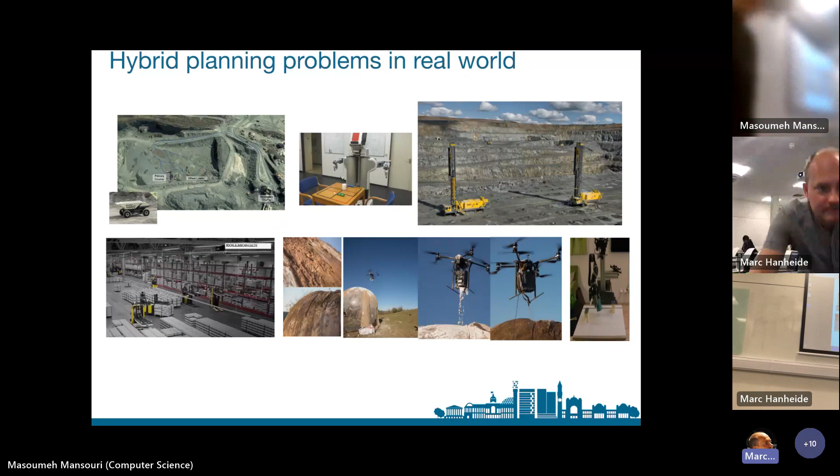So that's the paper we wrote in 2021, Combined Task and Motion Planning: Challenges and Guidelines. If you are doing this type of research, I do encourage you to read the paper because I wrote the guidelines there. I'm going to talk slightly about this paper today, not in depth.

So the challenges, which Marc doesn't like to hear, but I'm going to tell anyway. Most people, when thinking about solving the task and motion planning problem, look at the application, but they have to think about certain specific parts of the application. And what are those specific aspects? We wrote it as five questions.

And I'm really happy whenever I nowadays give a talk about a particular application, people ask me, oh, of the questions you define in this paper, which ones do you consider? So it's a real pleasure to see that the paper, the questions we put out there, have some impact in the community.

Anyway, obviously you have to think about different levels of abstraction. Is this a problem only solved within the task planning domain? For example, if you're doing a game, probably you don't need to do motion planning. What level of abstraction do we have?

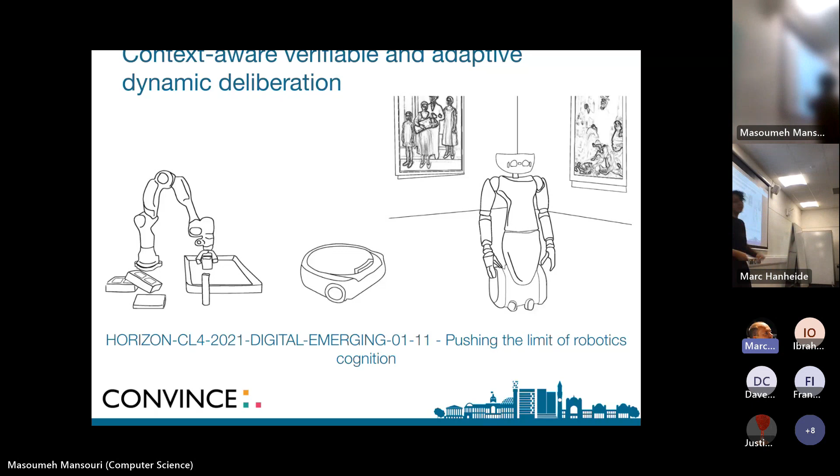So in the manipulation robot, in the assembly task, the task and motion planning really should be done at the same time, because the order in which you do assembly depends on the kinematic constraints your arm has. You cannot just come up with a sequence and then say, okay, now do your assembly, because probably the task you specify for the arm is actually not doable for that specific arm. So that's a good example of task and motion planning.

And this is the part I'm leading on the project, task and motion planning in dynamic environments. And dynamic means everything: it could be humans, it could be the socks on the floor, which could be moved, and reasoning about all of those at the same time.

Yeah. So, just a couple more. I'll talk about this and then I'll move on, because this is an ongoing project. I don't have any results, so I can't show you cool videos and say look how amazing the things I've done are. But I already have to ask a lot of questions, all those questions that I put up there.

So the representation of uncertainty in all these applications is different. We have a human there. This uncertainty could actually result from partial observability, because one brick blocks the view of another, and also the human moving around here. So there's uncertainty over the collaboration and intention of the human. Here the uncertainty would be the amount of socks or wires and the changes and all the furniture. So the representation for the uncertainty is different.

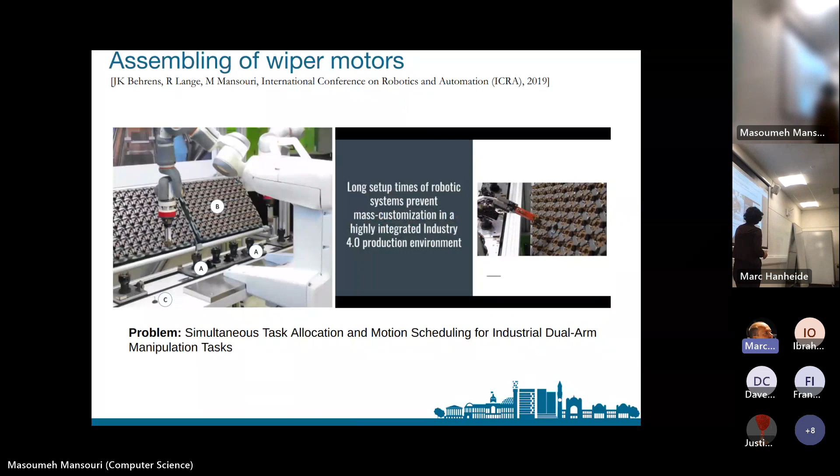of course, if you have a dual arm robot, the task is to allocate which arm does what. And you cannot just allocate randomly or use a task allocation method from AI, because again, we have the constraints of the arm. So not just any off-the-shelf AI algorithm for task allocation would work. Also, there is a motion scheduling part here.

Because we have a dual arm, we want to avoid arm collision. And we have so many items, so we want to solve it in an optimal fashion. We don't want our one arm to really move a lot for another arm. So we want to do everything in an optimized way, as I said.

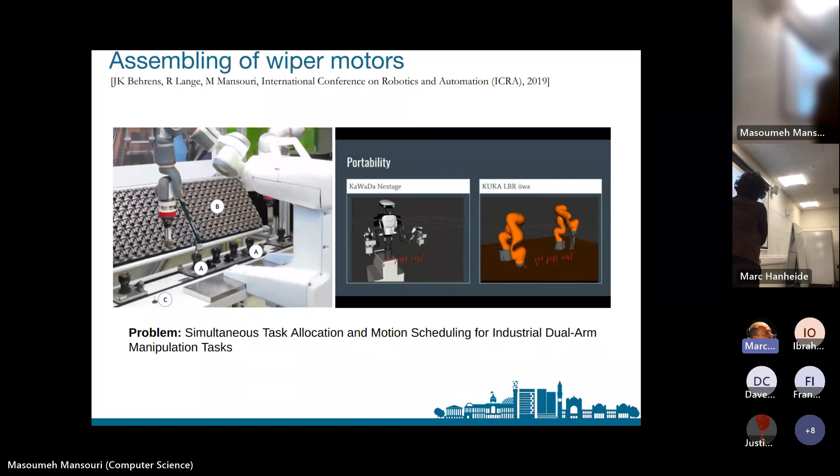We want to optimize the makespan, the time to completion. I don't intend to explain the details of any of the work I present today, but we have to answer some of the questions I put out there. Here, for the discretization and the symbolic part, my student Jan, one of the former PhD students, created a PRM for discretizing the environment, basically that symbolic approach.

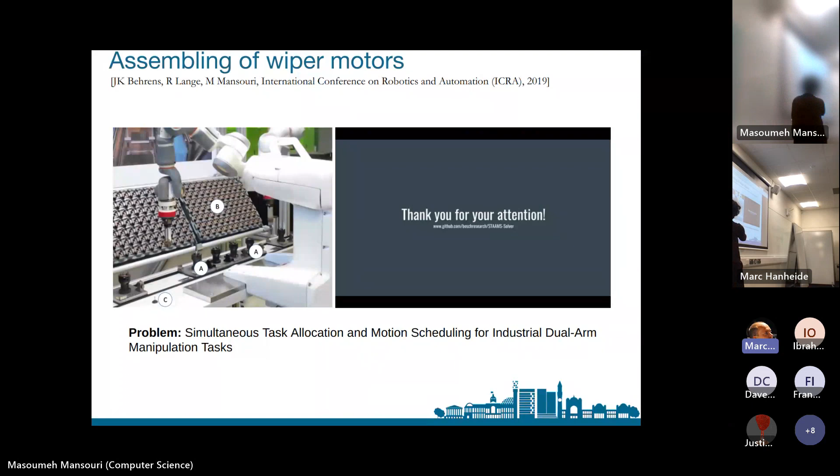And then they use constraint-based reasoning for the combination of task allocation and motion scheduling, where he represents time and the task constraints there. Yeah. So, this is enough.

Again, here, as you probably noticed, there is no uncertainty handling. So we assume that we have knowledge of everything, and this is a structured environment, which is not necessarily the case in all assembly tasks. And even then the problem is still difficult for the reason I just said.

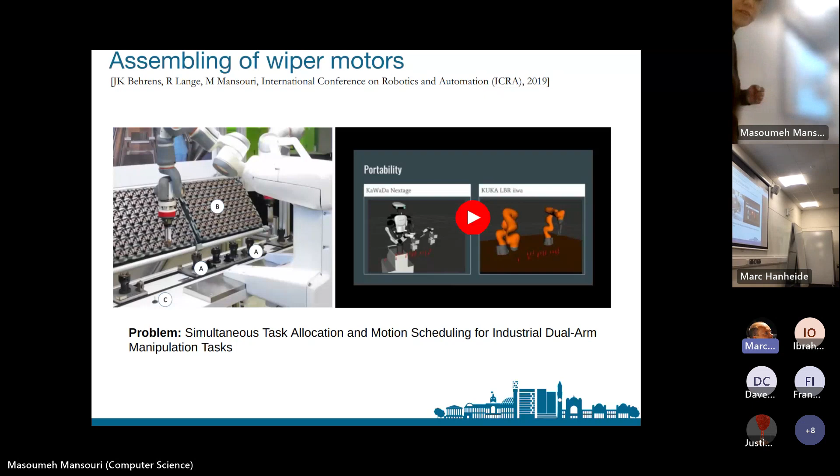My favorite problem of all. I think you know this problem, and for the last 5 years I haven't given any keynote talk where I haven't talked about this problem. It's just amazing, and I'm going to explain why. I have 2 active PhD students working on this project. It's a mining application, but it gets more interesting.

So these are the mining robots. They're huge mining robots, really huge. I've been in the north of Sweden, and their wheels are as tall as me. Their job is going through these drill targets, all those dots over there, and drilling them. And when you drill, it creates a hole and also a pile. When you drill, usually piles scatter around the hole, right?

And interestingly, the task is basically the optimized way, the quickest way, for these robots to drill all the drill targets. What kind of traditional computer science problem can you think of now? The task is to go to every node, basically. TSP, the traveling salesman problem.

So when you drill a hole, it creates a pile, and that pile becomes an obstacle for the robot itself and the other robot, because if you move over the pile, it defeats the whole purpose of the drilling, right? It puts it all back inside the hole. Why would you drill? Again, the perfect example. So you have to navigate this environment while you have to visit every node once.

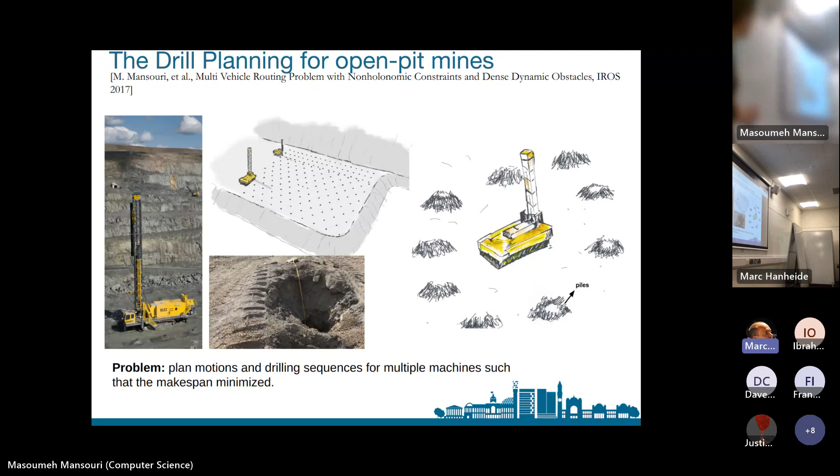And because you cannot just not think about your motion constraints while planning, you cannot get the best TSP solver and then call a motion planner to complete that. That simply doesn't work. And I spent quite a lot of time solving this problem practically, and in a theoretical way.

So let's look at one of the practical videos. This is my first result. As you see, it goes back. It actually goes back to 2017. The timing is wrong, but anyway.

So what you see, I'm just stopping. The behavior you see is the result of meta-constraint reasoning. The overall problem is divided into several sub-problems. Sequencing, and you see the result of this sequencing as this white arrow. Approach angle decision: at which approach angle I approach the drill target.

And that matters because these robots are non-holonomic, so when they maneuver they will actually take a lot of space, and that approach angle affects all the maneuvering. Also motion planning, which is shown by all these white polygons. Coordination, by which I mean robot-robot collision avoidance. Task allocation, which robot does which hole, and sequencing within each robot. All of these decisions have to combine so that this kind of behavior is produced.

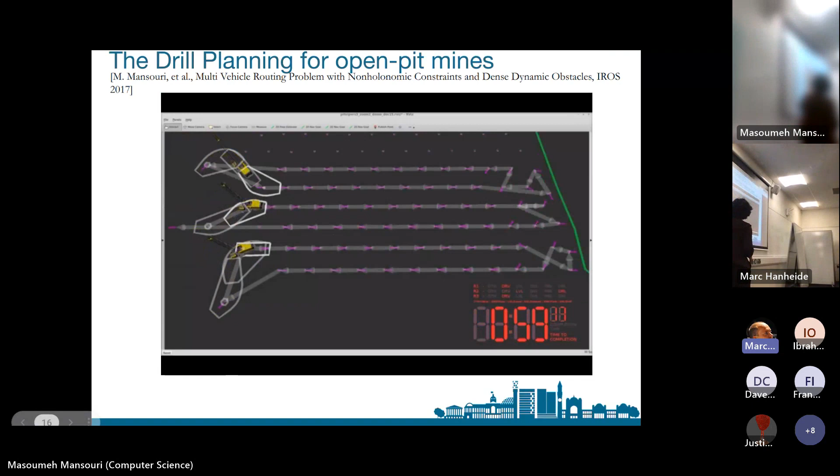So I explained. But this is also a showcase: you will see this robot in the middle of this region got broken and it has to be taken away from the field. I want to explain what's happening. Let's get into the interesting part. By the way, these robots are moving backward while drilling. This is not that exciting information, but it's going to get interesting.

So the robot in the middle got broken, removed from the field, and the robot on the top basically takes the mission that was supposed to be the robot in the middle's. And something interesting happened now. You will see this robot doesn't move, and I will tell you why. First of all, this green line is a virtual perimeter, which is there, for example, because there's a cliff, so the robot should not go beyond that.

So the space this robot has to move in is very tight. This robot is waiting because it's supposed to drill all these drill targets. But if it didn't wait and continued, all the piles drilled by this machine would be destroyed by this machine, because it needs all of that area to maneuver. And you will see that while this crazy maneuvering is done, the machine on the bottom starts moving.

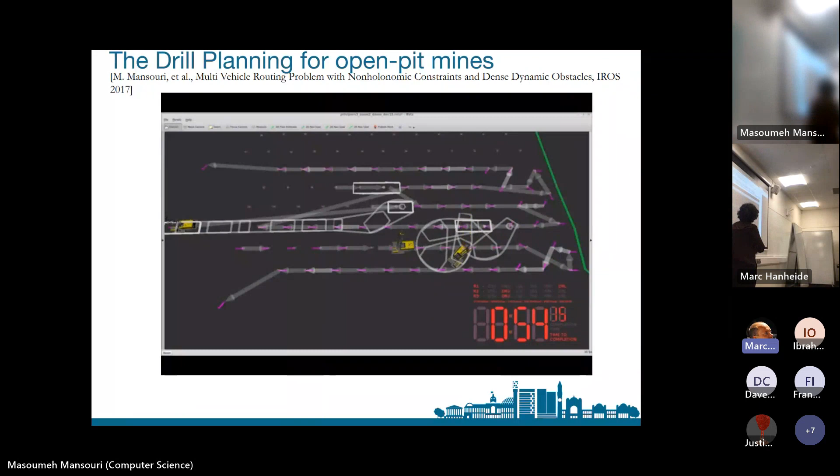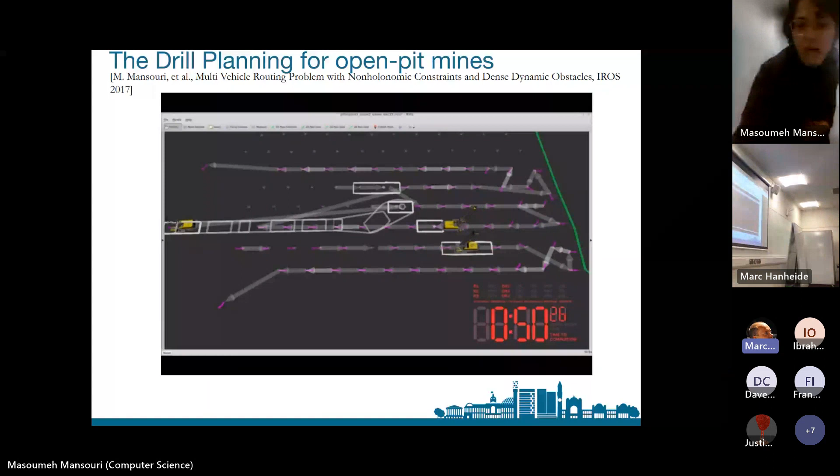Of course, this is not the most optimal solution. You would think that if this robot used that area for maneuvering, the time would be more minimized, and I did use this kind of reasoning in my second paper, in 2017 IROS, which is a kind of hierarchical optimization problem. I'm not going to show you the second video. If you're interested, you can look at the slides.

But here we thought, if this is not a TSP, what is it then? So Sarah, a brilliant PhD student, started working on understanding the theoretical underpinning behind this problem. She formulated it, devised a general algorithm, and defined the self-deleting graph. The same problem appears in painting: you don't want to go over the same place again. In agriculture, you don't want to go to a place you already harvested because of soil compaction.

You would think this problem is different, but essentially it's a dynamic coverage problem where the source of dynamicity is the robot itself. The robot moves and changes the environment. The difference is the discretization. Here the discretization was given by the drill targets. In painting and harvesting you have to discretize the environment in one way or another. But the theoretical understanding of this variation of TSP would help us.

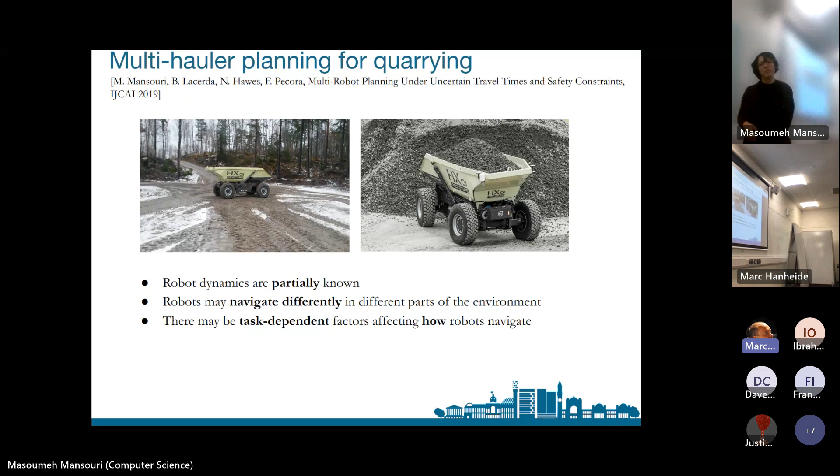Again, why am I doing this? Because the time is very uncertain. Because this robot moving in this environment, the robot dynamics are partially unknown. There could be a sandy patch, a robot may skid over. When robots are heavier, they go slower than when they're not. So we can't actually have a perfect time prediction. Hence, everything is much more difficult. How we solve this, I'm not going through the details. It's very, very high level.

We look at the stochastic Petri net. We model the task allocation as a stochastic Petri net. A stochastic Petri net has different kinds of transitions. One is decision making, for example, which station we want to go to, and there is a transition for capturing that stochasticity, which comes from uncertain time modeling, and we receive that uncertain time modeling from a realistic simulation. We run a simulation and we learn basically that transition, and theoretically this can be translated to Markov automata. This can be related to MDP. Well, everyone knows MDP, and then we have a team policy. Voila. I like this problem because you can actually theoretically guarantee the specification you have.

You could have learned this from data, but Volvo didn't have that data. You guys, because you have a lot of collaboration with industry, have loads of data. You can think of a similar application with similar constraints. You could have put in your learned distribution. The video is not that interesting, because it's in simulation, and this work is actually accepted in a quite prestigious venue.